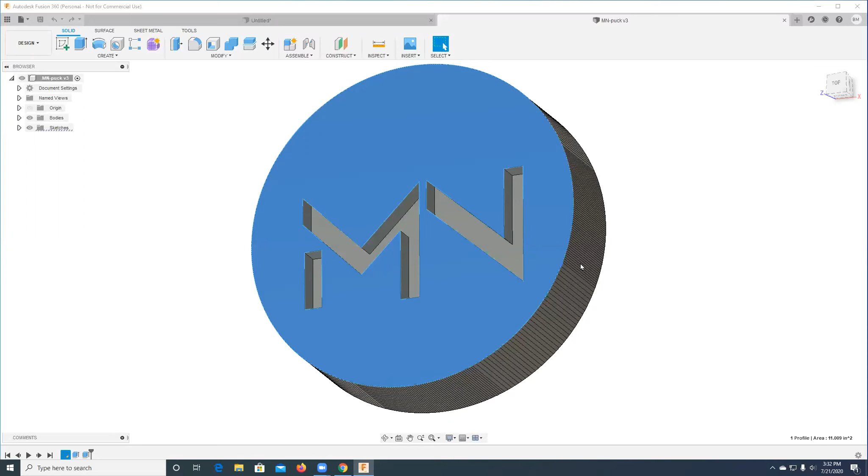I'm not going to show you how to draw this. There are hundreds of tutorials available online to teach you the ins and outs of Fusion 360. I'm going to streamline this to take geometry that's already been created and create the files needed to make this happen on the ShopBot. So here we have the item, the geometry, the design, the extruded model, whatever you want to call it. I did this in the design tab.

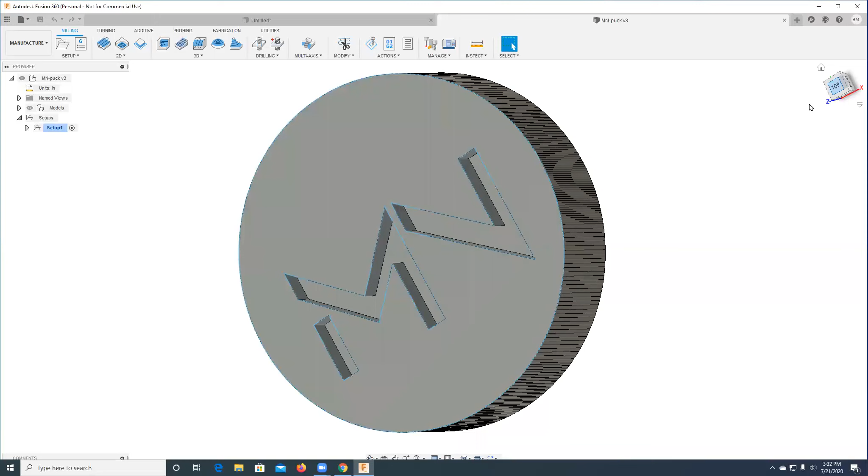We're going to go to the manufacture tab of Fusion 360. Since I already have one, I'm going to deselect that. I'm going to create a new one. So here's my model. First thing I do is I come over and I create a new setup. Setup is basically a setup for doing machining of some variety. I click New Setup. I need to select whether I'm going to mill or turn or 3D print or whatever like that. We're going to be doing what's essentially milling, so that's good.

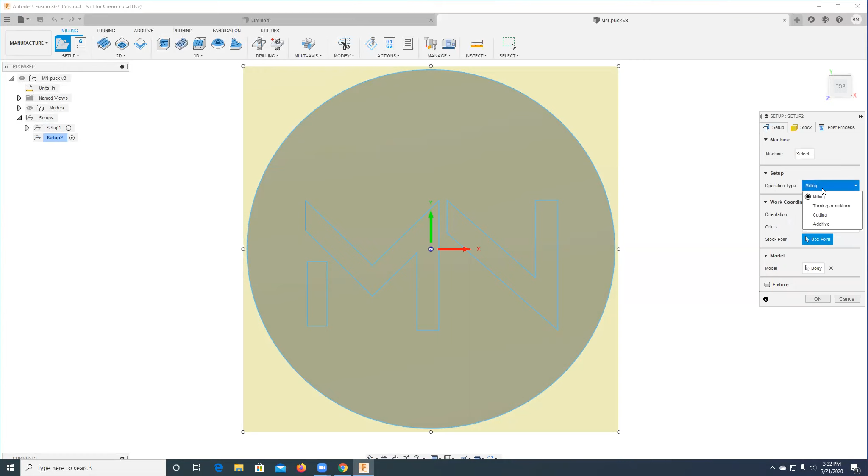The work coordinate system, since I drew this and I used the correct plane so that my z-axis is pointing up, I don't have to change the work coordinate systems. However, if you happen to draw yours so that the z-axis is pointing another direction, you need to rearrange your model so that x and y are flat on your material and z is pointing up, because that's where z is supposed to be.

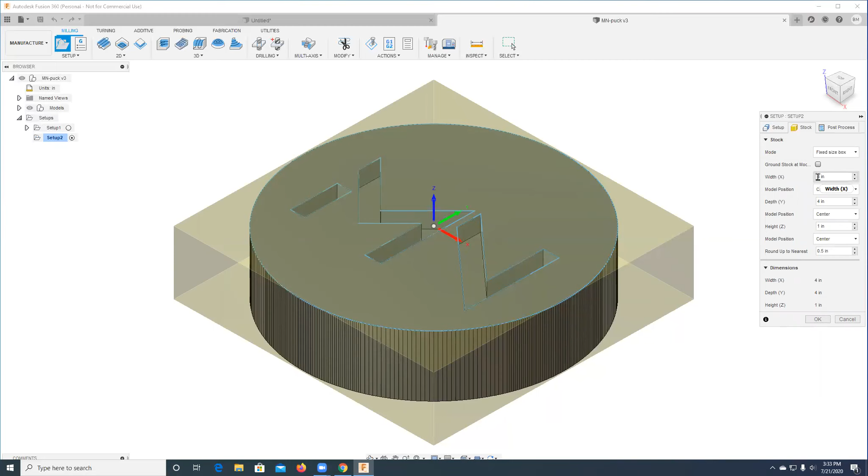Okay, I'm going to use one of the corners of the stock as my origin point. You can see that my model's origin is the center top of it because that was convenient when I was drawing it. I actually want it to be down here in the lower left-hand corner as my origin. So I'm going to go to stock and I'm going to create the size of my material. By default, it says you just want it to be a little bit bigger than your item. I'm planning on using a fixed size material. Let's say it's going to be 6 inches by 6 inches. Seems like a reasonable size.

So that's going to be a block of material. By default, it comes in even inches. My model is actually 0.972 inches thick because that's how thick the material is that I've been using for teaching the class. So I'm going to make the actual thickness of my stock to be 0.972, and I've got to go back there and finish doing that. Okay, so 0.972 is the thickness. It's 6 by 6.

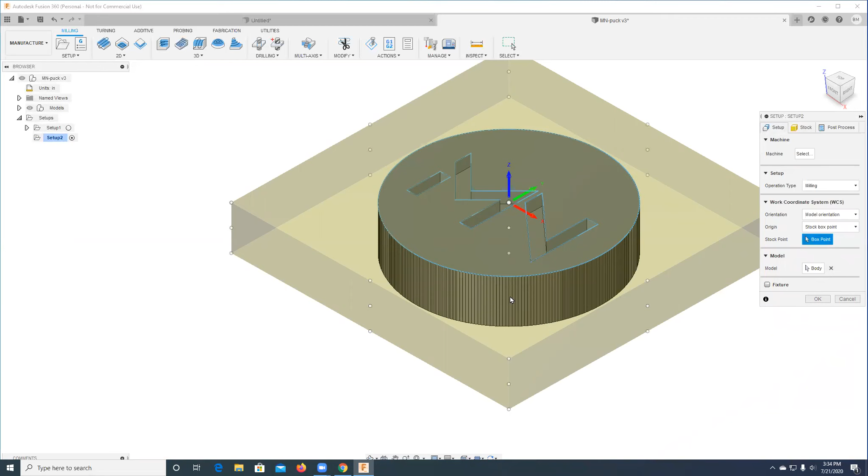I want to go back here and I'm going to create my origin to be the lower left-hand corner, which is going to be this one right here. Now you can see that my X and my Y and my Z are aligned here. So this means that my Z0 is going to be on the table and that X and Y are going to be positive. It's good. I'm going to click OK.

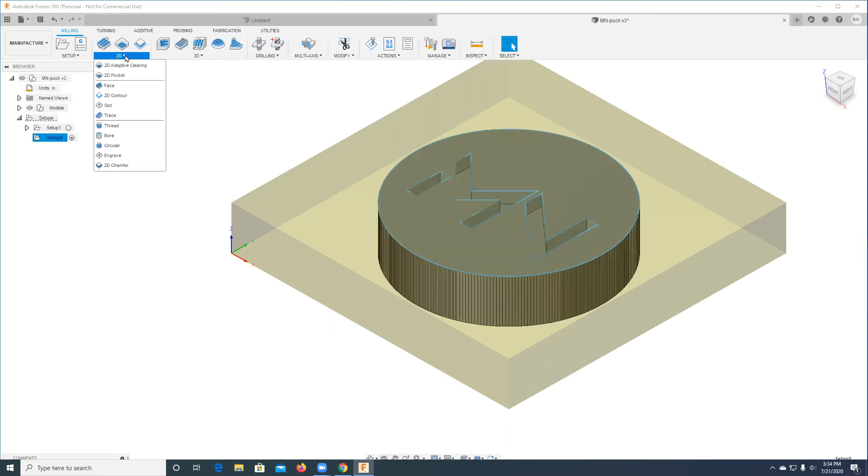So we're going to use an engraving tool to engrave the logo. So I'm going to go over here to 2D, my 2D choices. Notice I have 2D and 3D and drilling and so on. We're going to just use 2D today. I'm going to click on the engrave choice. So over here I have 5 tabs. I need to fill out at least 4 of them.

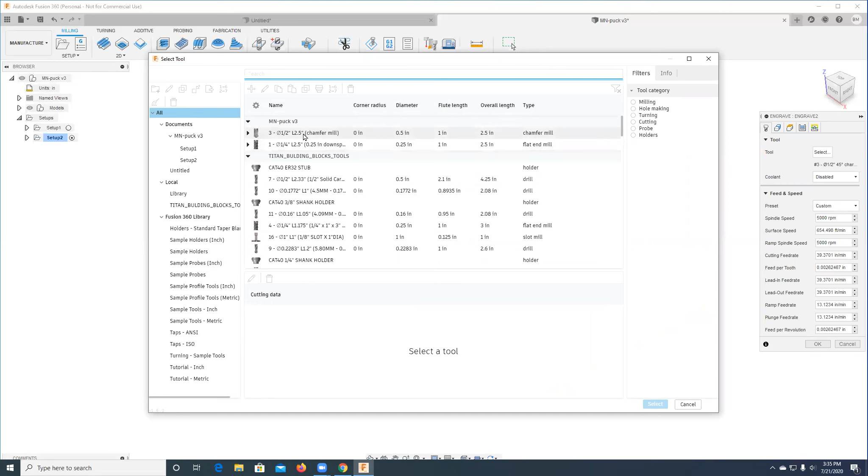First thing we need to pick is which tool we're going to use to cut that. I've already predefined 2. There's a large library that you can go through. You can also create your own or import libraries that have been created for you. I created earlier a tool number 3, which is actually a 1/2 inch wide engraving V-bit. Select that. It selects my tool. I have a choice of coolant or not. Since the ShopBot doesn't have coolant, I'm going to disable it so it doesn't confuse it.

Spindle speed, let's use 12,000. My ramp speed, I'm also going to go 12,000 RPM. My cutting feed rate, let's go with 120 inches per minute. Lead in feed rate, we're going to use 75. Lead out, same thing, 75. Ramp feed rate, 75. Plunge feed rate, 75. It's great. Next is geometry.

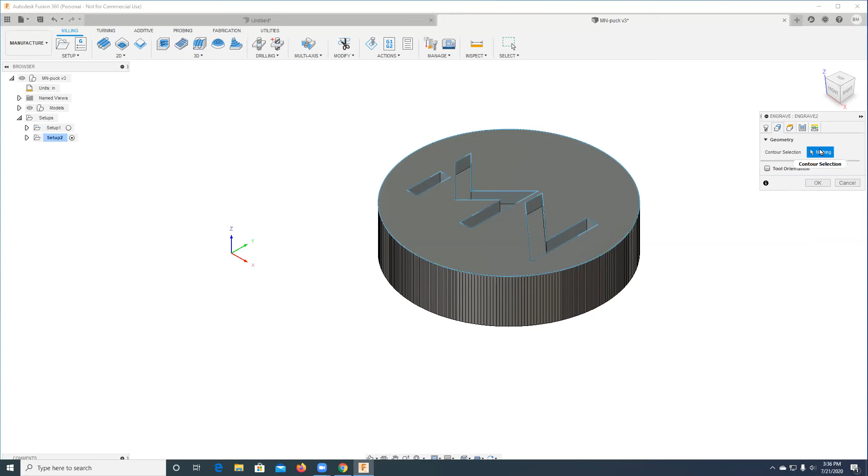This is basically saying, what do you want to cut out? Nothing's been selected, so I'm going to go over here with the pointer and I'm going to select the top of these 3 choices right here. Notice the top and not the bottom. That will give me a very different choice. And it says I got 3 chains, which I can acknowledge is exactly what I wanted to do.

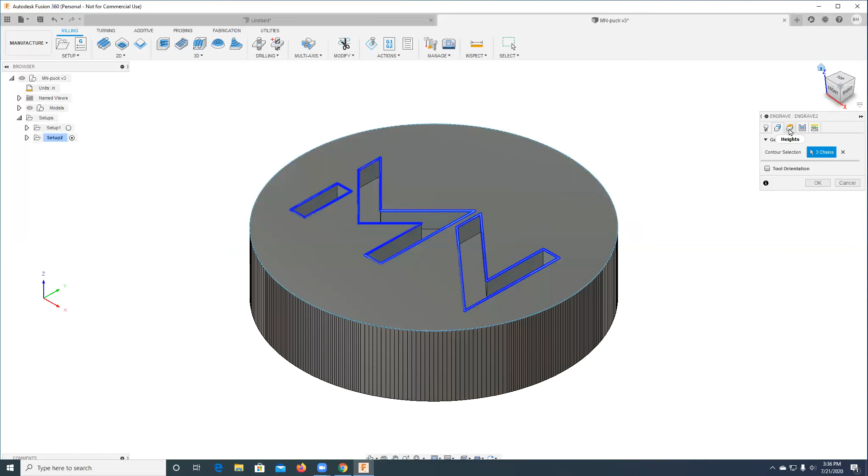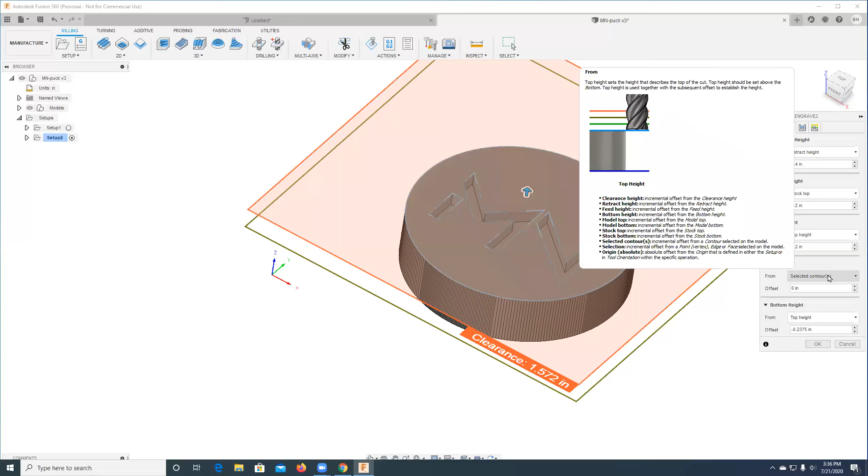Okay, next up is heights. By default, what it does is it gives you a nice view of where the cutting heights are going to be. In this case, the only thing we've got is clearance and retract. I'm a fan of either using the model top or stock top as your height for all of these. So top height is my selected contour, that's good. Okay, so this is basically where does the tool start from. This is a matter of how safe do you feel with the tool traveling across there. 4/10 of an inch is plenty of clearance for most operations.

Next up, it's going to say passes. We don't really need to make multiple passes because we're just engraving. And the last one is linking, which we mostly ignore for the ShopBot. I'm going to click OK, and it's going to generate my toolpath and give me an idea what it's going to look like. If I'm curious what's going to happen, I can come up here under Actions,

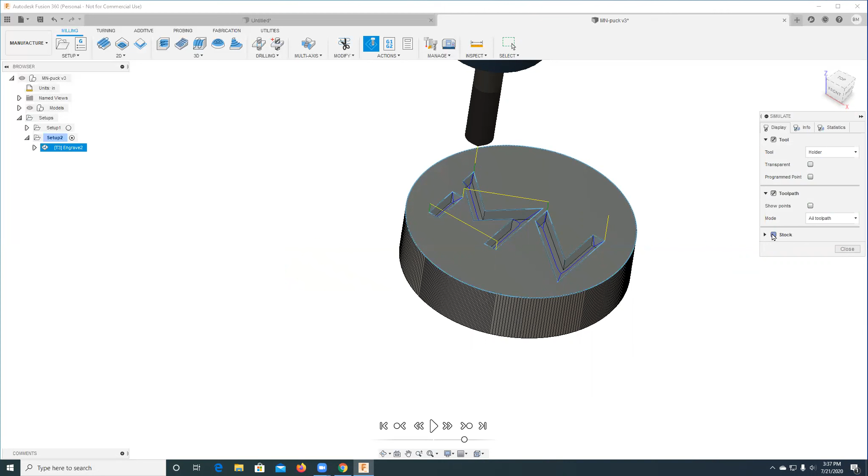and I can click on Simulate. When I click on Simulate, by default, the stock isn't shown. It's just going to show you the toolpath, but I like to see what's going to happen and actually cut out of the material. Down here at the bottom, I have a play button. When I push the play button, it shows me what's actually going to happen. For some reason, even though I selected the geometry in a different order, it decided to optimize and do the middle one, then each side. No explanation. So there's a good simulation of what it is. I click close over here.

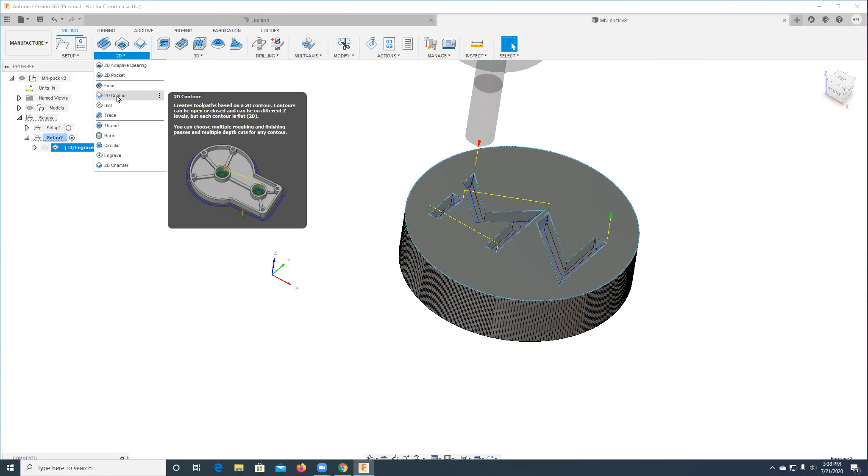Next thing I want to do is I want to cut this out of my material. So I'm going to do another 2D operation. This time I'm going to do what's called a contour, which basically means follow some geometry and cut along some lines. So I'm going to do a 2D contour. I'm going to go back and select my tool. This time I'm going to use my 1/4 inch down spiral, my all-purpose cutting tool that I use in the shop all the time. Again, I set this up earlier. It's 1/4 inch wide, about an inch of cutting length and all that.

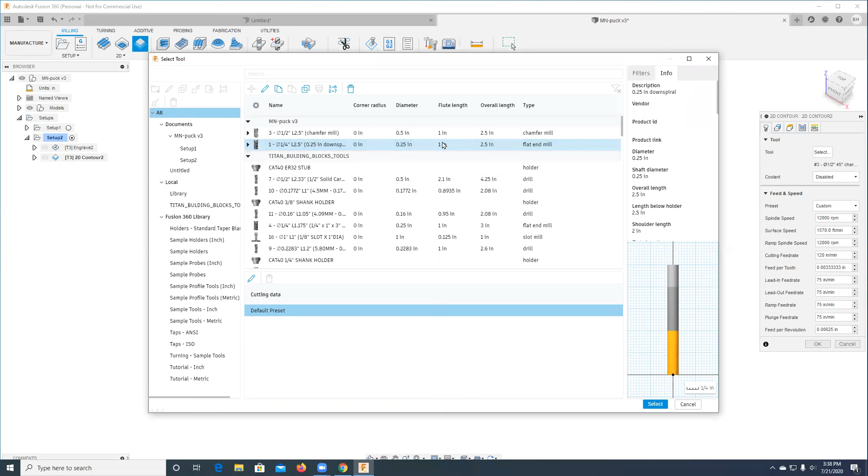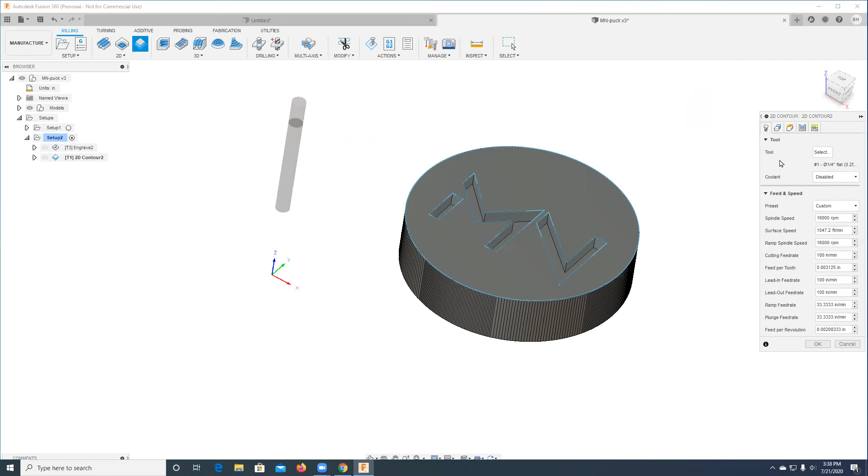Okay, I don't need any flood coolant. I'd prefer to have no coolant. This is good. 16,000 RPM is a good choice for this. 100 inches per minute is a nice rate. Looks like these are all set up very nicely from before. Again, these can be set. You can customize these to whatever you like. There are hints online, and when you take the class at Maker Nexus, we'll give you a handout that gives you suggested feeds for different materials.

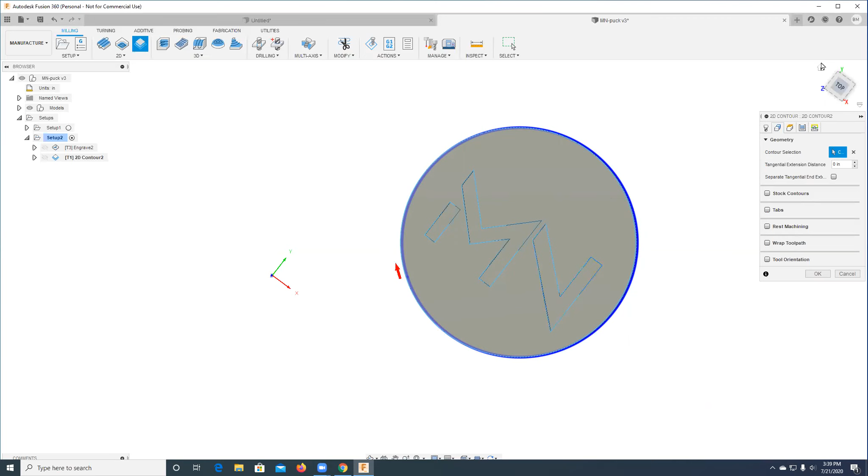Okay, moving on. Geometry. It's what do you want to cut? I want to cut this line on the bottom down here. Notice that there's an arrow. This arrow tells me which side of the material I'm going to cut on. So right now it's on the outside, which is what I wanted to do. If I click on the arrow, it'll move over to the inside and it'll show me that I'm going to cut on the inside of the line, not what I want, but good to know I have the choice. Okay, so there's my geometry selection.

I really don't want to make this all in one cut because that would probably be pretty loud and really hard on the tool. So I'm actually going to go to the next tab. Actually, we're going to start with heights here. So again, I like to use the model top for model top and stock top, which in this case are the same thing. Okay, my clearance is 4/10 of an inch above my retract height, which is how far do you go between passes and so on. Feed height 2/10 down. The top height, which is where am I going to start cutting from, and the top of the stock or the top of the model would be a good place. And how far down to cut, basically the selected contour, which was the bottom of the material.

Super. As I was saying, I really don't want to do this all in one pass. So what I'm going to do is I'm going to do multiple depths. And on multiple depths, I'm going to say I want to do this 1/8 of an inch at a time, which is great. I have the choice of basically finishing a smaller cut. Doesn't much matter in wood, so I'm going to skip over that. Okay, and stock to leave is also if you are going back with a smaller cutting tool. We're going to leave that unchecked. It's very good. And linking, again, we skip over this mostly. I'm going to click OK.

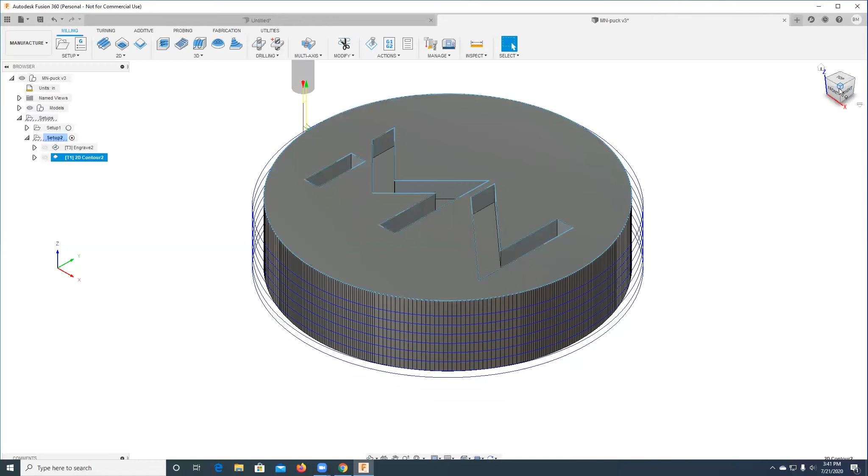And it's going to tell me here's what's going to happen. So here's my path for that. Let's do a quick preview and then fix it later. You'll notice over here that there's lead in, so basically it leads in, goes around, and leads out. It's not what I want to do, but let's do a quick simulation and see what that looks like anyways.

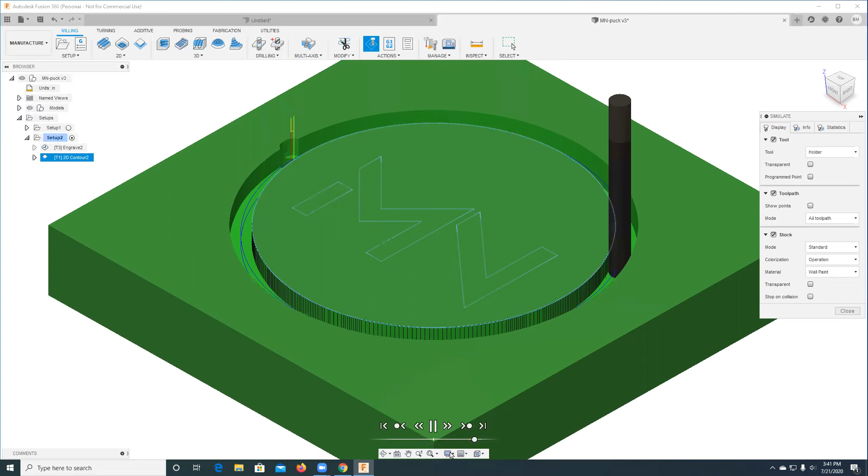Okay, so I'm going to do the simulation, and I'm going to click play. So it's going to go around. It's going to come back in. This is being inefficient because it keeps coming up and down. So we can do better than that. This would work, but there's a better way.

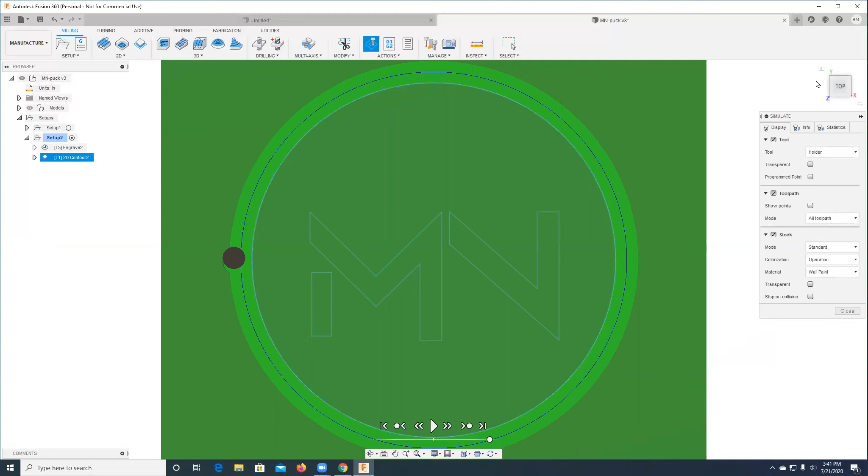Let's finish this up really quickly here. Want to make sure that it cuts all the way to the bottom. And it looks like it did not, so we'll need to fix that as well. Since I still see some green, this means that my path is incorrect and I need to fix it so that it cuts all the way through my material.

Okay, so there's two things missing. One, we didn't cut all the way through the material, and two, we didn't leave tabs there. So we're going to go back and double click on this and fix those few things. Okay, so this is fine, the geometry is fine.

My heights, I'm actually going to change this, and I'm going to go all the way to the model bottom with an offset of 0 inches because I really don't want to cut into the table. So I'm going to go all the way down to the bottom of the model. Actually, let's go all the way to the bottom of the stock. That should be the same thing.

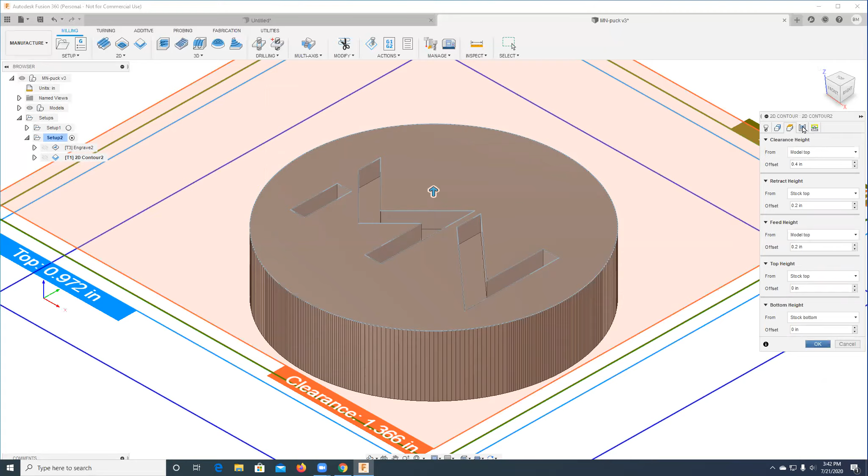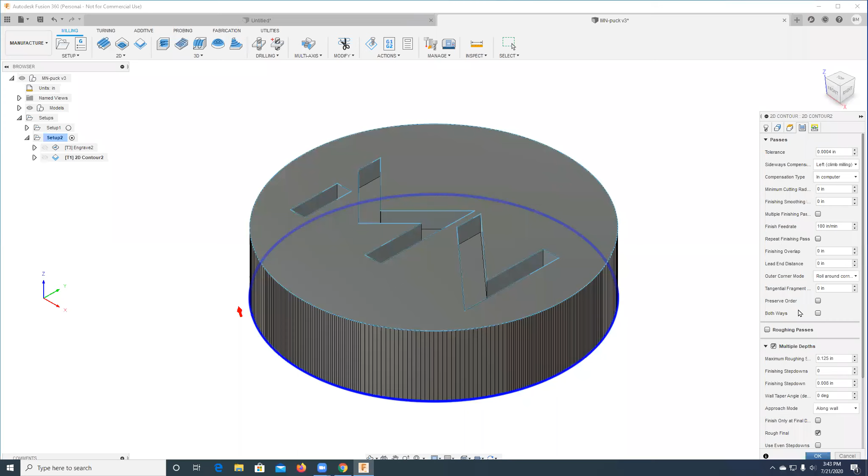Okay, so on the passes, we need to change the multiple depths. So what we're going to do is we're going to select ramp right here. So what ramp will do is instead of stepping down one pass at a time, it'll do a continuous spiral. Let's see how that works.

And we're going to remove the lead in and lead out. That was that little hook on the side. Let's recalculate, see what this one looks like. Oh, this looks like a nice spiral. All right, let's do a simulate, see what it looks like. Do our simulation. Speed it up.

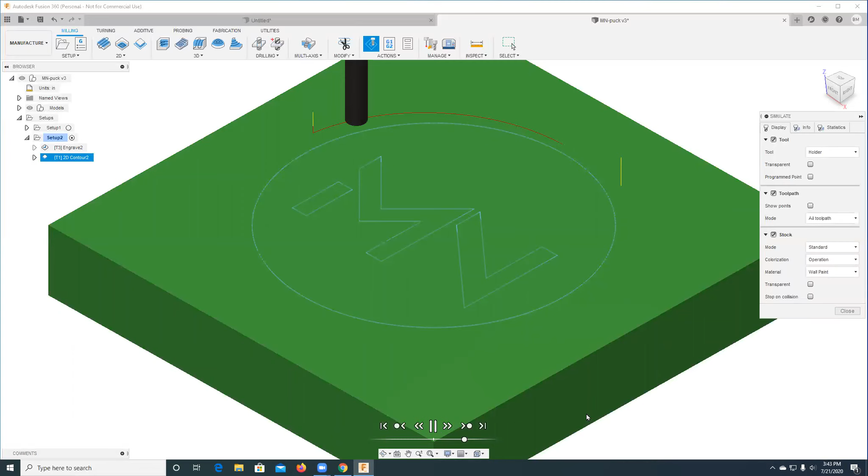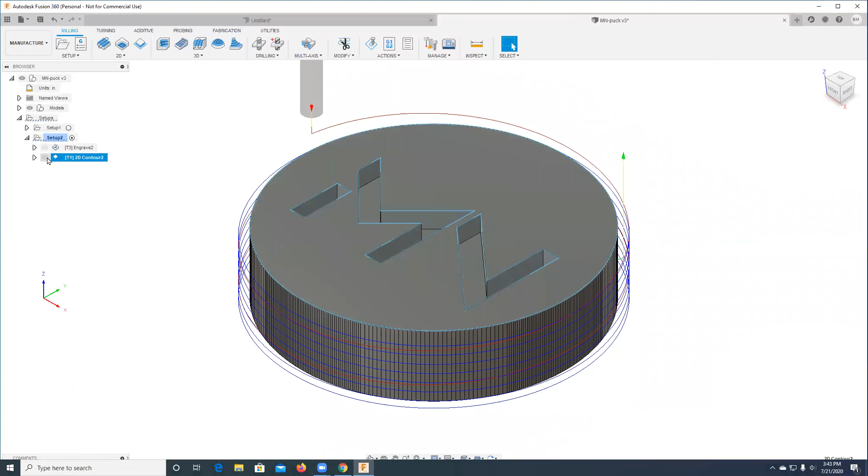Much faster. And we go all the way through, but we still forgot to do the tabs. Okay, so let's fix that too. Gonna leave this. We're gonna go back to our angle right here. Double click on the contour.

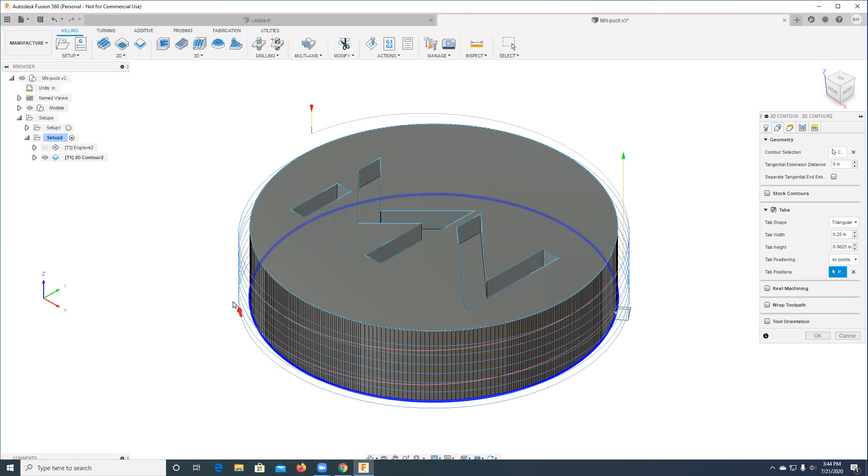Over here in the geometry, where we selected our geometry, we have a choice of tabs. When we selected yes, we want tabs, we have the choice of being rectangular or triangular. And we can either do them every so often, or we can say, I want to pick the place to put them. So let's put a tab here and put a tab over here on the other side. That should be enough to hold it in place.

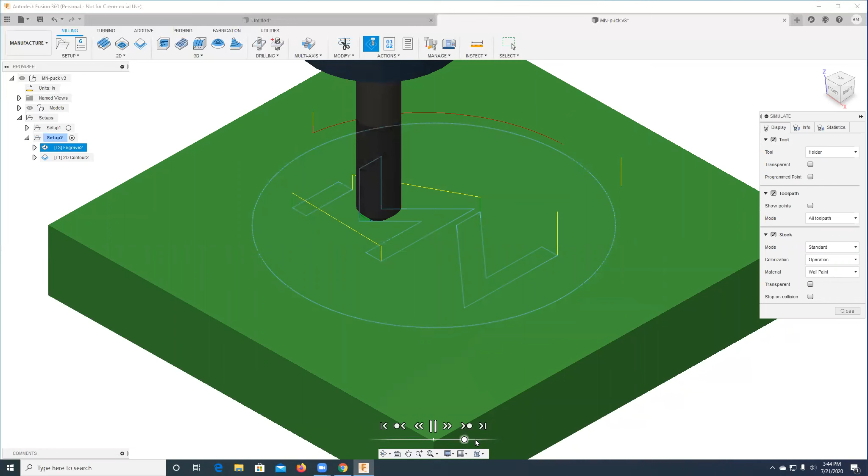I'm going to say OK, it'll recalculate. And this time we have tabs. So if I click on setup, I will get both of my tool paths. Let's do a simulate. This time we can see that we actually left a little bit of a tab on there. That's great. Okay, so now that we have what we want, we are going to save these paths.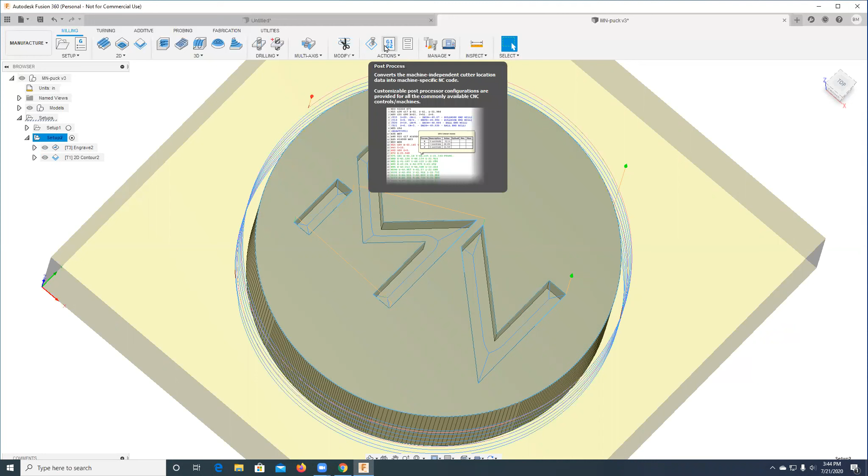So this is where we move to the next item over in the post-process section. We're going to click one tool path at a time. I'm going to click post-process. So the first time you do this, you'll need to search for the ShopBot post configuration, and there are actually two of them.

One of them is called ShopBot ISO, and this one makes G-code, which is not preferred. The other one is called ShopBot OpenSBP, and what that does is create a normal ShopBot file like we've looked for. You can give your file a name here, and you can put a description, which will show up in the file itself.

And we click post, and it says, what do you want to call it? Where do you want to put this? I'll say save. Since I checked the box that says show me the code, it actually opens up an editor so you can look at and see all your glorious ShopBot code and get an idea if it's what you wanted. It's really hard to read, in general.

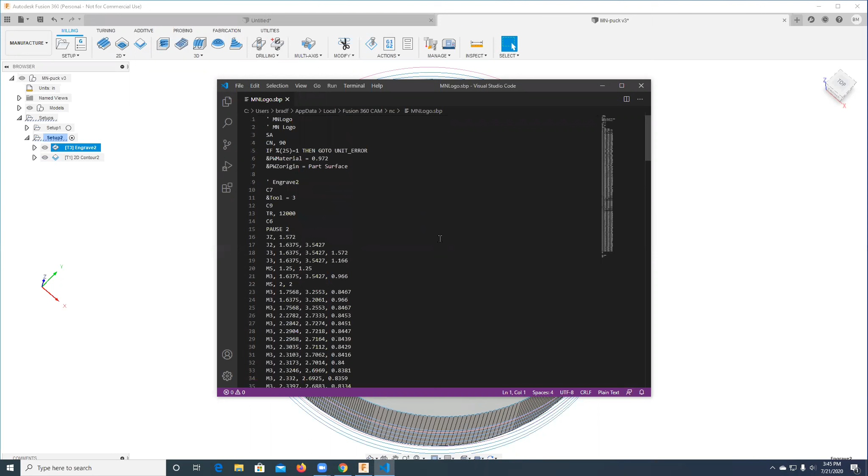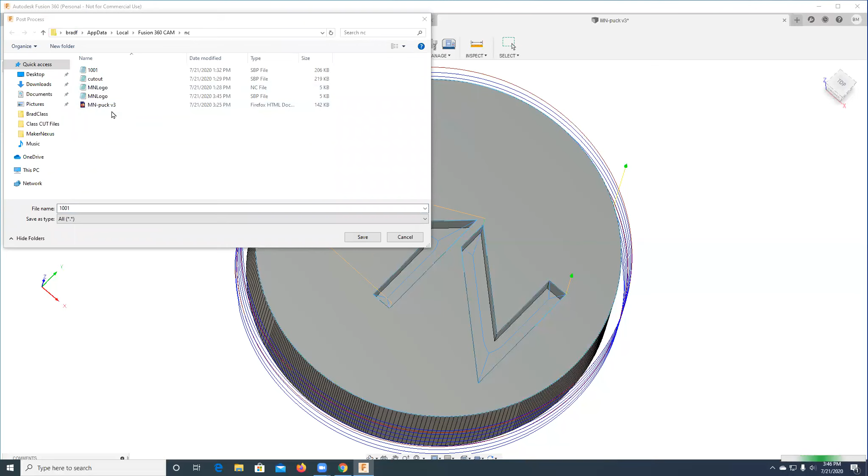So, okay, that's great. So I saved the one for the engraving toolpath. Now I want to save the post process there. This time I'm going to say don't show me that. This one we're going to call cutout, and I'm going to post it and call it cutout. And there's my files. So I'll take those to the ShopBot and run them.

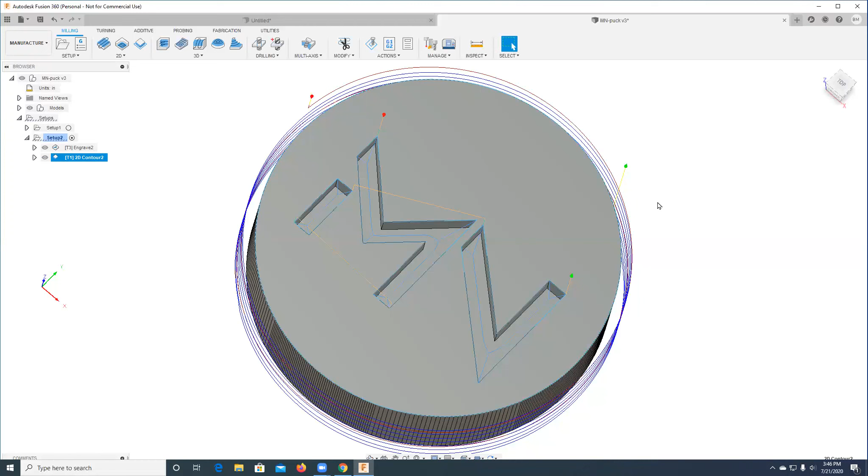Now the advantage or disadvantage, as you may call it, of using this here is that you are not able to use the auto zero function available on the Maker Nexus ShopBot. So you'll have to do the manual Z zeroing. And again, remember, we suggest using the table because that's the safest.